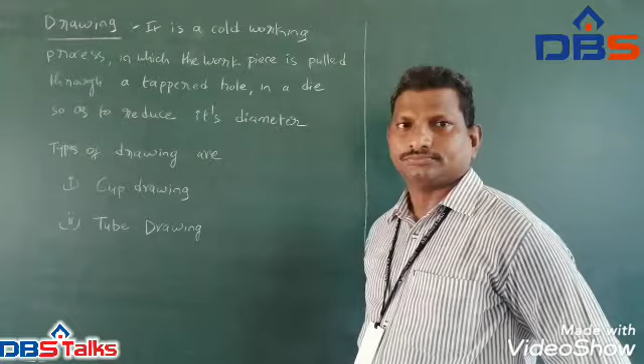Let us discuss the process of drawing. Drawing is also one of the sheet metal working processes which we may do on sheet metals.

So what is meant by drawing? It is a cold working process in which the workpiece is pulled through a die. This die will have one hole, and through this hole the workpiece is pulled so as to reduce its diameter.

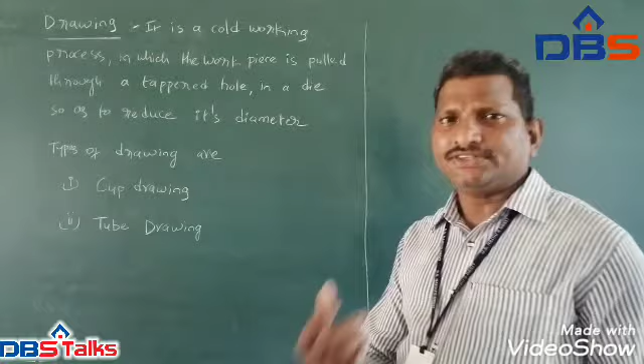Drawing is a cold working process. How can we say so? The temperature at which we do the sheet metal work is lesser than the recrystallization temperature, then that process is called a cold working process. Here we are carrying out this drawing process at a temperature lesser than the recrystallization temperature, that is why we are calling it a cold working process.

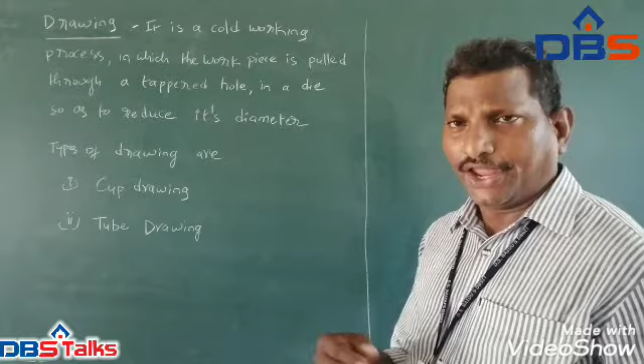So in this drawing process, what is the main aim? We have to produce devices like cups and tubes. If the drawing process is used to produce cups, then the process is called cup drawing. And if the drawing process is used to produce tubes, then this drawing process is called tube drawing.

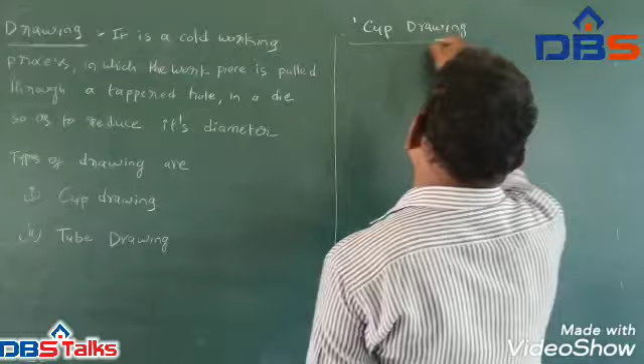Let us discuss the mechanism presented in the cup drawing. In this cup drawing method, the devices we need are punch, die setup, and sheet metal.

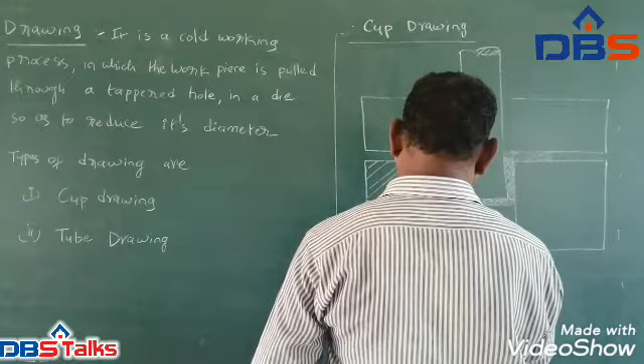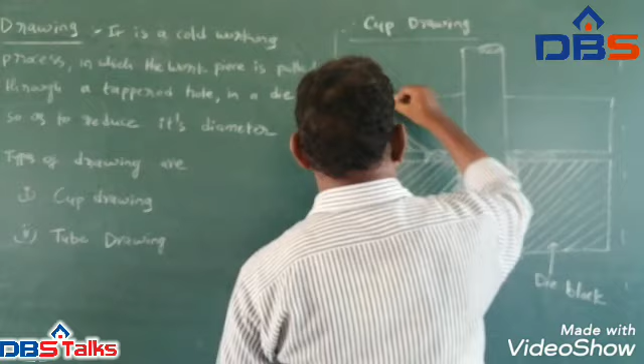We are drawing the hatching section of the die block. This is called the die block. And now we are drawing the hatching section of the punch holder. This is the sheet metal. Punch, okay.

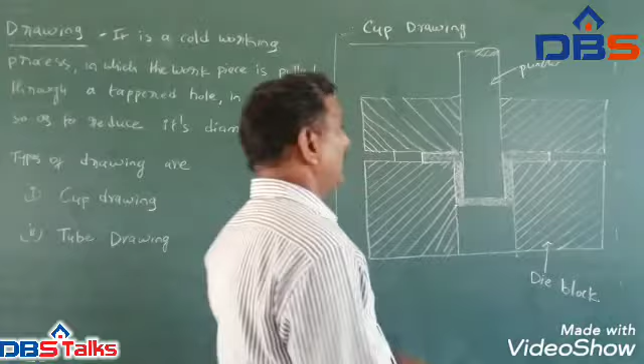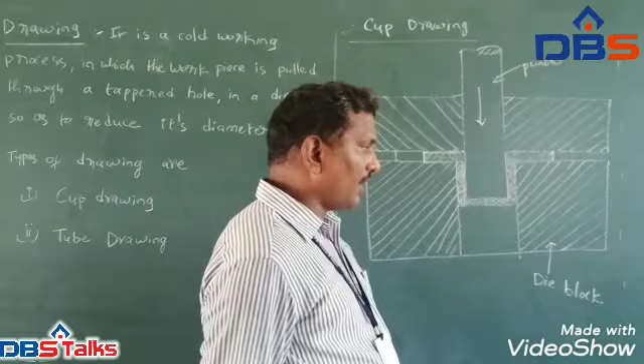You are seeing a schematic diagram for the cup drawing process. What are the devices which may be used in a cup drawing process? Die block, punch, and stock or sheet metal.

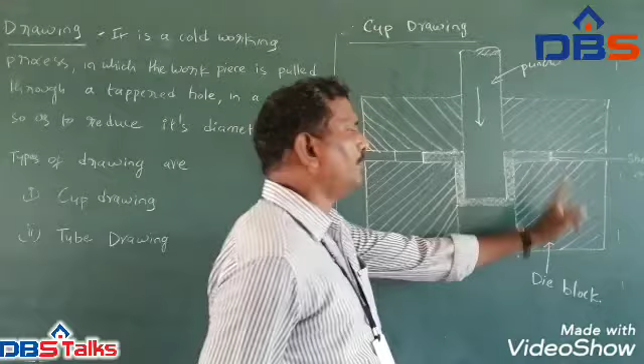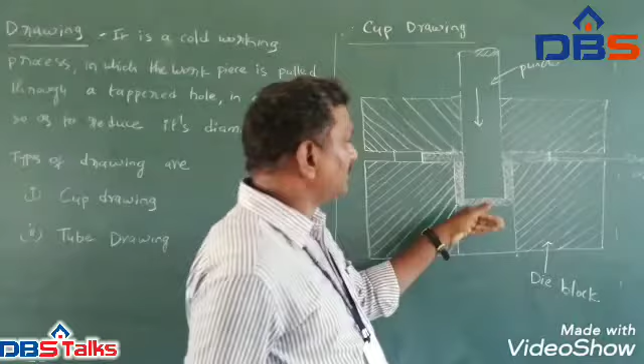What is the shape of this die hole? This is just like a cup. So before producing this cup element, first we will place the flat sheet metal on this die block and put the punch holder upon it. Then we will allow the punch to fall down into the die block hole of required size. Because of the force acting upon the sheet metal, this flat sheet will turn into the cup-shaped object.

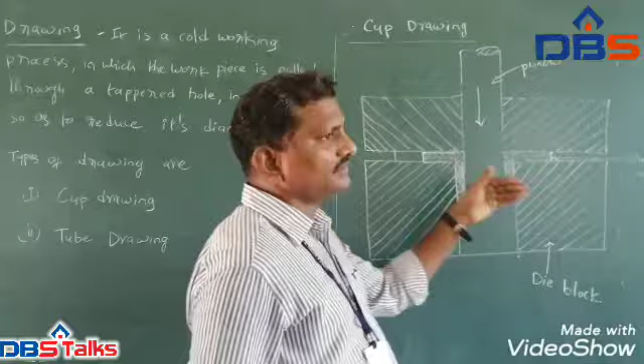After producing this cup, the punch will be moved up and we will collect the produced cup. By this, we will produce the cups. Since the cup is produced by the method of drawing, that is why we are calling it the cup drawing method.

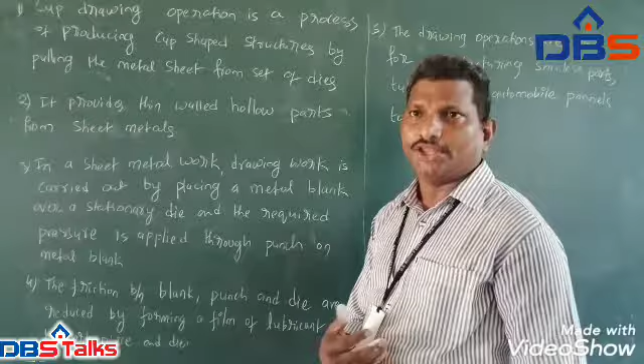Let us discuss the main points presented in the cup drawing process. The cup drawing operation is a process of producing a cup by using a die, punch, and a blank.

What is meant by blank? Blank is the input sheet or input material which is meant for producing the cups. This is taken from the sheet metal.

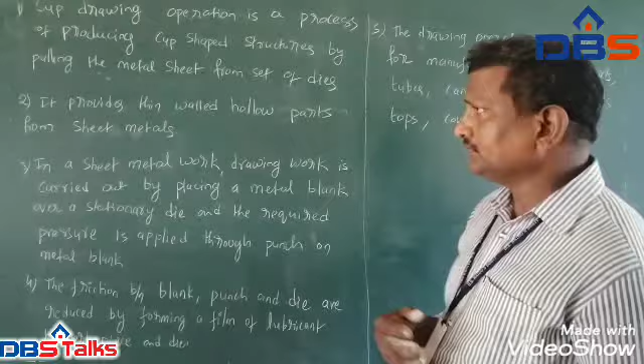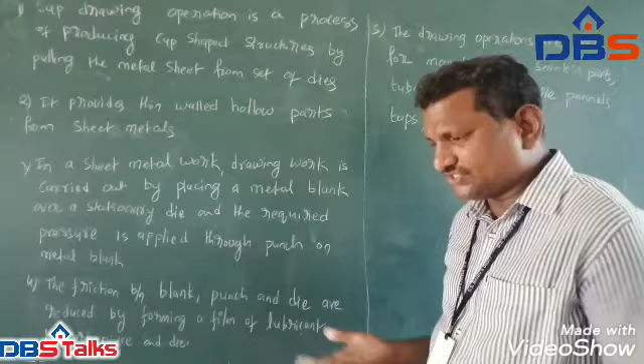So what is the procedural steps involved in producing the cups? First, the input material or blank is placed between the stationary die and punch. As the stationary die rests on the ground and the punch rests on the blank, in between these two there is a hole or cup-shaped cavity presented in the stationary die.

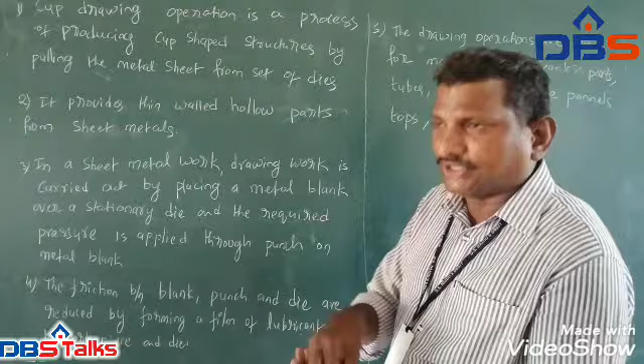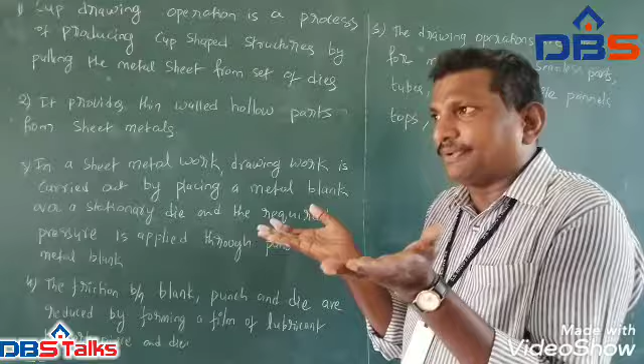Once the punch is allowed to fall on the blank, which passes through that hole, what will happen? A pressure or force will exert on the blank. Because of this force, a cup-shaped object will be produced.

So in this mechanism, there exists friction. To reduce the friction, we will apply a lubricant, a thin lubricant film, in between these three contact surfaces.

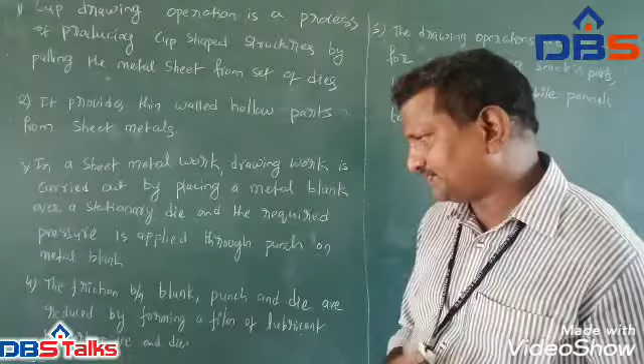By using this cup drawing operation, we can produce thin walled cups. The drawing operations are also used to manufacture or produce seamless parts, seamless tubes, automobile panels, and automobile tops.

Let us discuss the tube drawing process. Tube drawing. By seeing this title, we can understand this method is used to produce tubes by the drawing sheet metal work process. What are the devices we need? One is a vertical die with a hole.

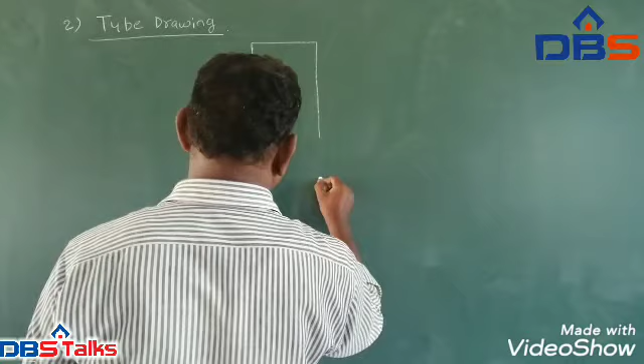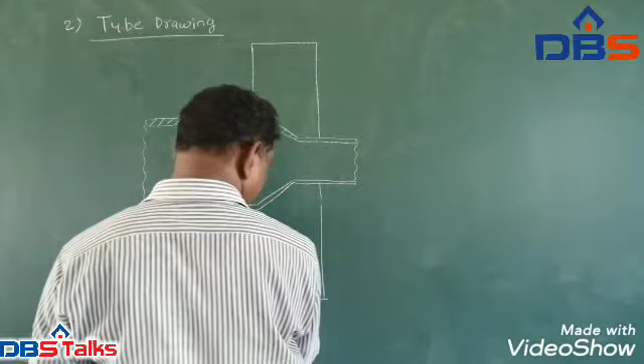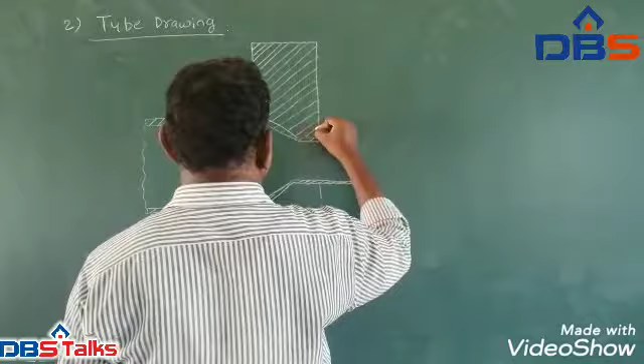We are drawing the hatching section of the vertical die, which has a small opening of reduced diameter.

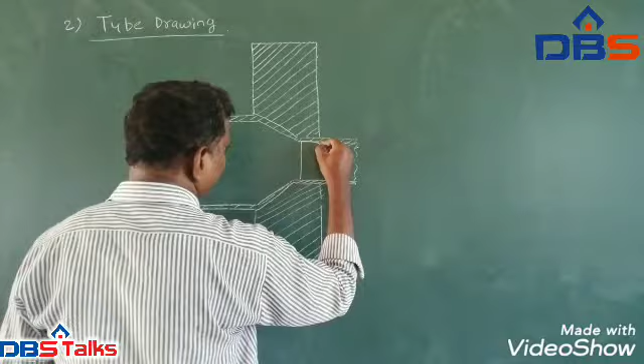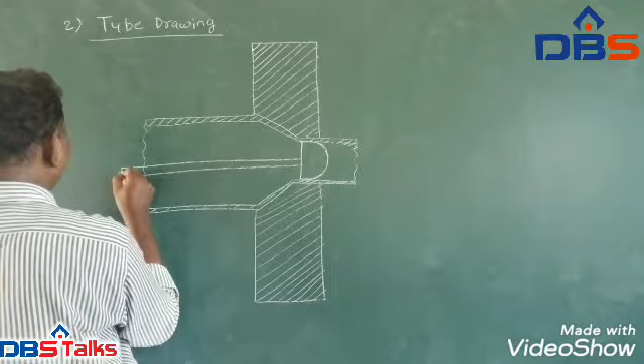Now I am drawing the die. This die has a diameter which is approximately equal to the required diameter of the produced tubes. Here, one tapered section is provided for smooth flow of the blank.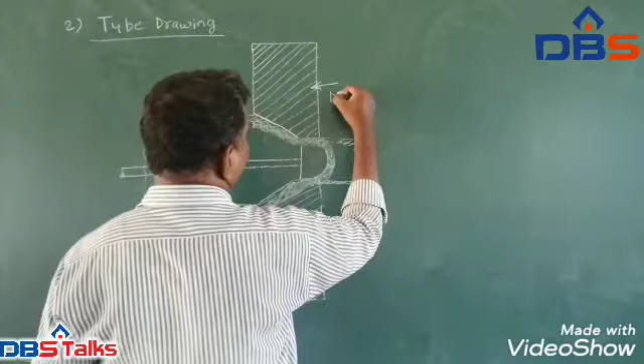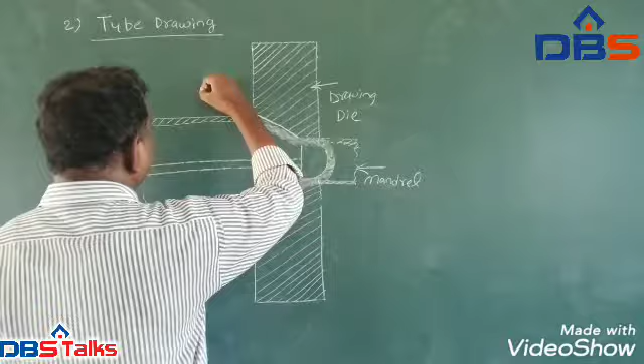This is the drawing die, and this is the mandrel, and this is the hot rolled tube.

You have seen a simple schematic diagram which represents the combination of drawing by mandrel and hot rolled tube, which is used to produce the tubes.

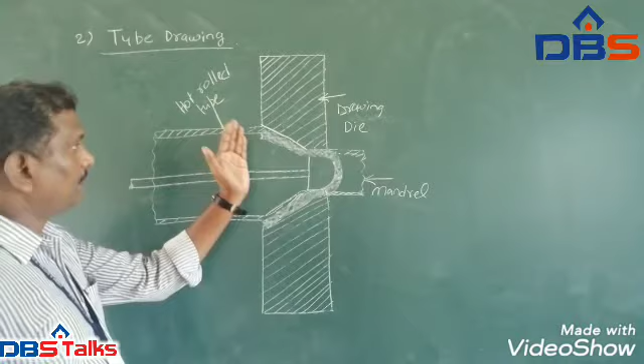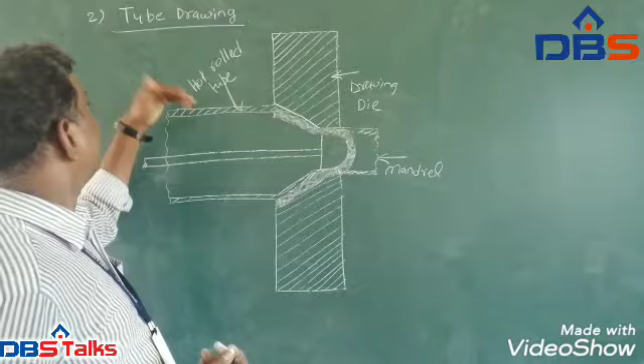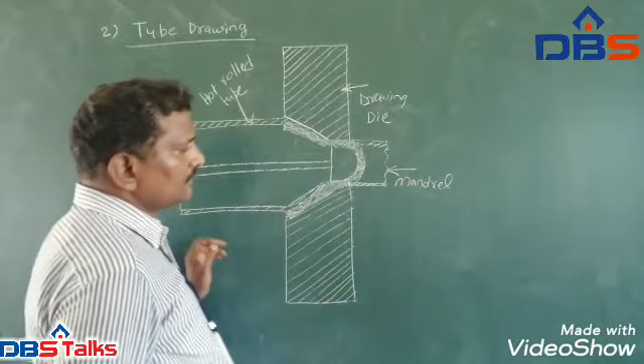So here is a mandrel and here is the tube drawing die. Through this hole, as this mandrel is pressing, the blank is made to pass through the hole or cavity of the die. So the produced object will be a seamless tube. By using this method, we can produce seamless tubes.

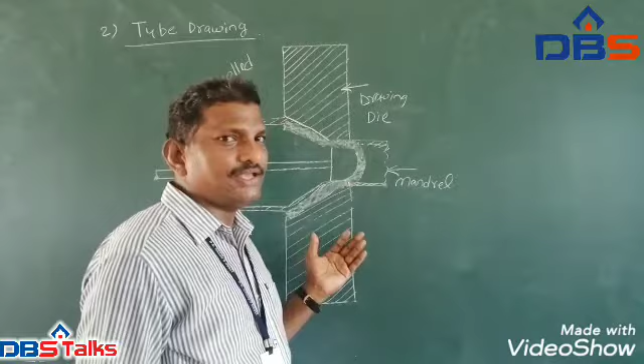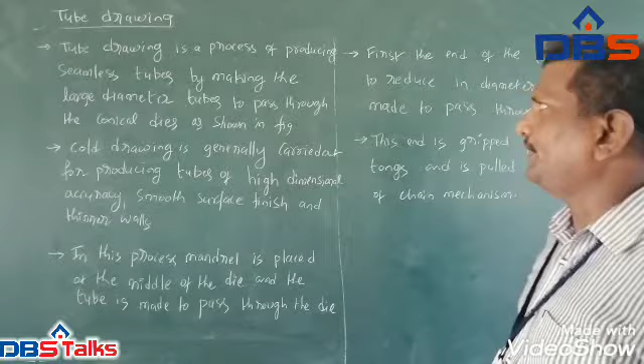Let us see the main points presented in the operation of tube drawing. Tube drawing is a process of producing seamless tubes by making the large diameter tubes pass through conical dies, as shown in the figure.

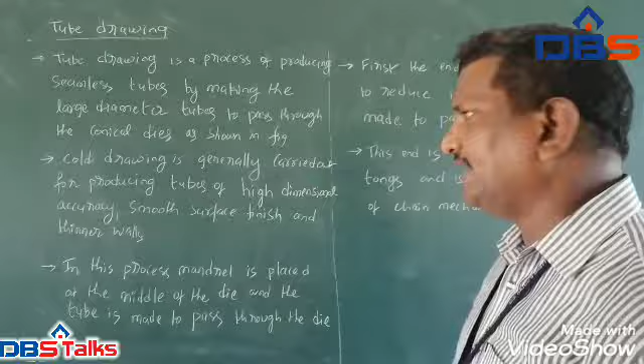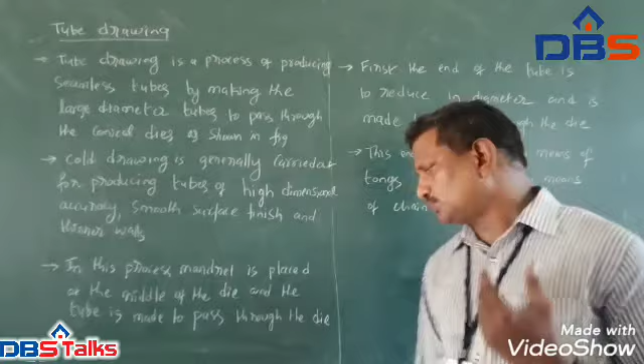Cold drawing is generally carried out to produce tubes of high dimensional accuracy, smooth surface finish and thinner walls. In this process, a mandrel is placed at the middle of the die, and the tube is made to pass through the die whose diameter is to be reduced.

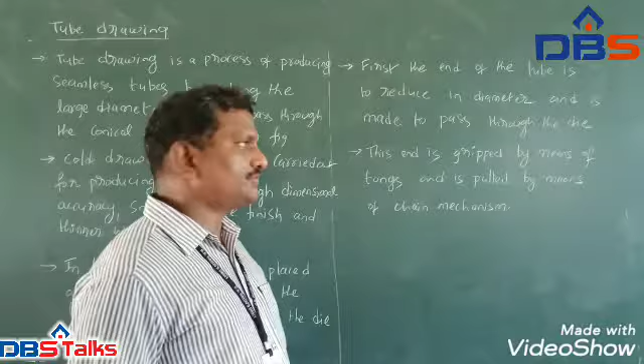The tube is heated and its temperature is raised to the recrystallization temperature, and it is made to pass through the die. First, the end of the tube, at which the diameter is to be reduced, is made to pass through the die. This end is gripped with tongs, and then it is pulled using the chain mechanism.

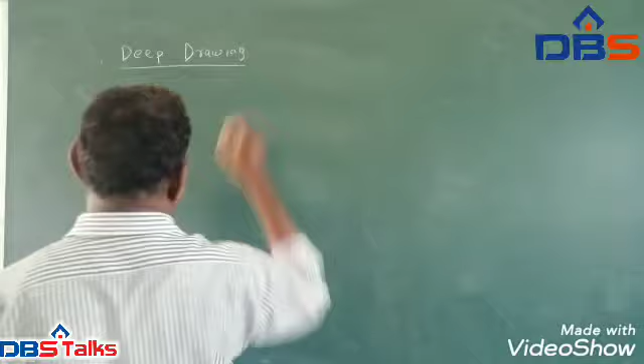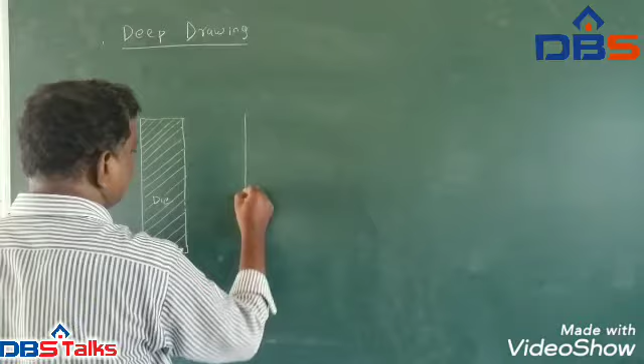One more method presented in drawing operation is deep drawing. Now let us draw the stages of die blocks, and one more die block.

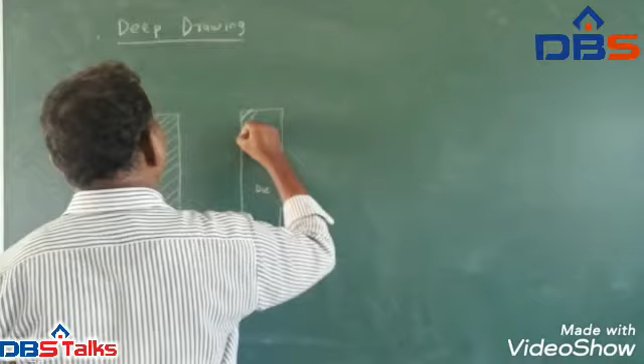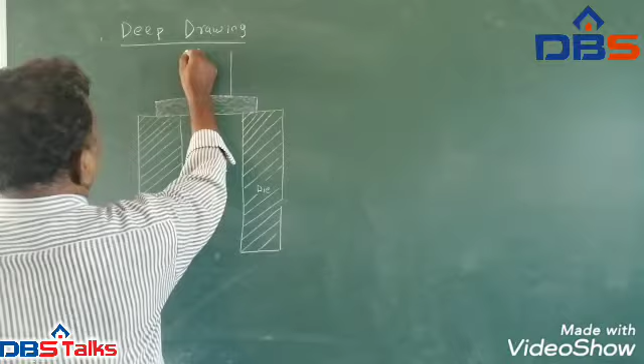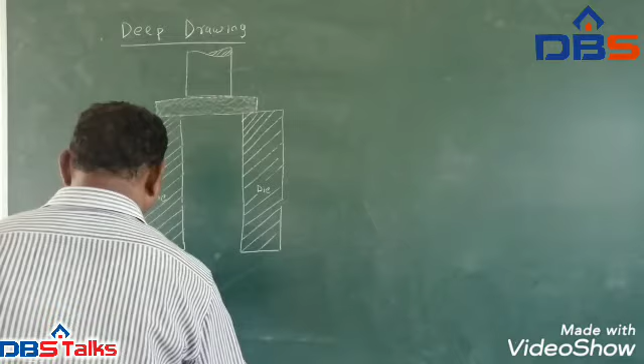Now we are drawing the schematic diagram which represents the deep drawing process, which is used to produce cups of larger depths.

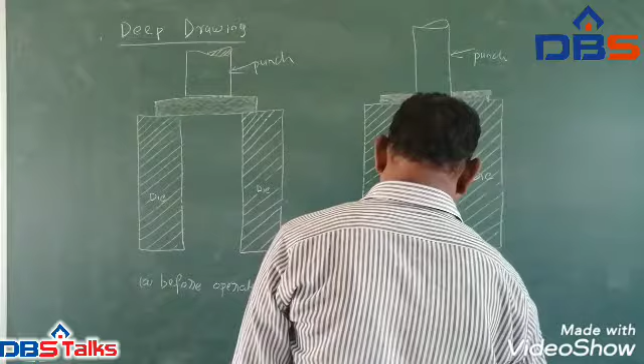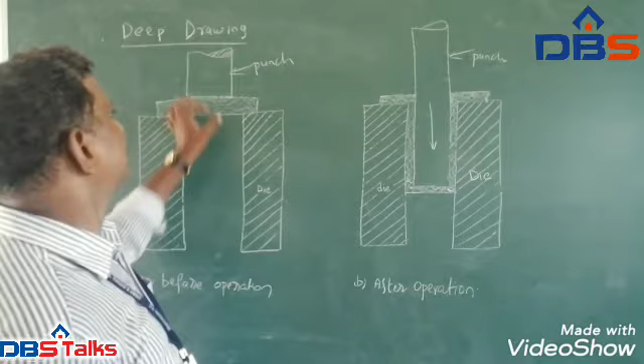Case B indicates the setup after the operation. In figure 1, simply a metal sheet or blank is placed on the two stationary dies, and we attach one punch.

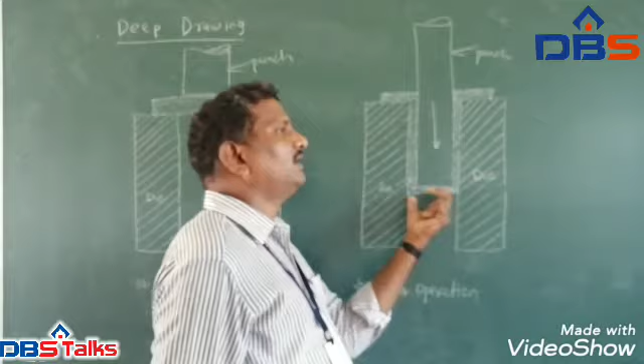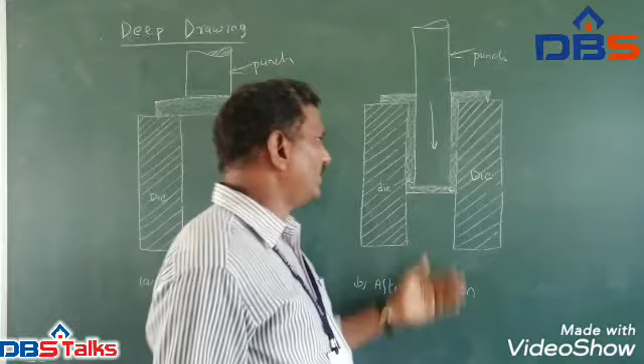To produce cups using this deep drawing method, the punch is made to press or exert a certain force on the blank. Between these two dies there is a cavity equal to the outer diameter of the cup. As the punch continuously presses and exerts force in the downward direction, a thin-walled cup of the required depth will be produced.

By using this deep drawing method, we can produce milk cans, washing machine tubes, and other engineering components.

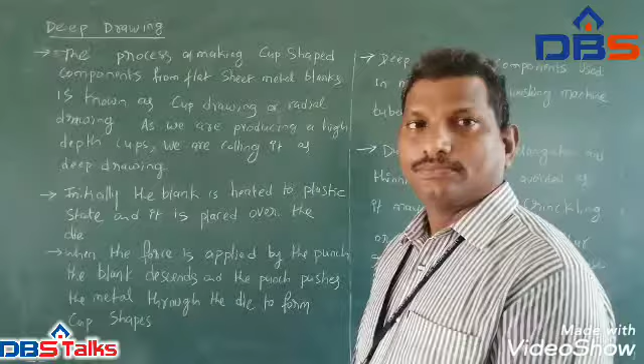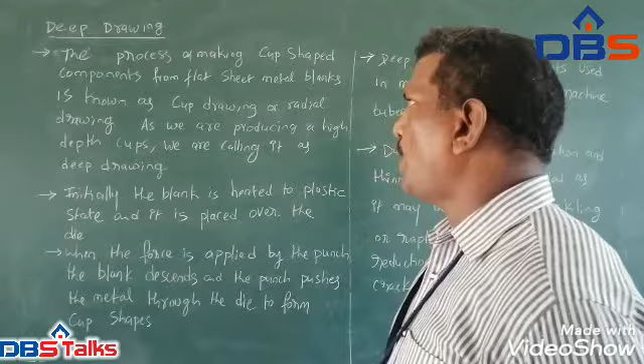Let us discuss the important steps presented in deep drawing. The process of making cup-shaped components from flat sheet metal blanks is known as cup drawing or radial drawing. This method is also called deep drawing, because we are making cups with higher depths.

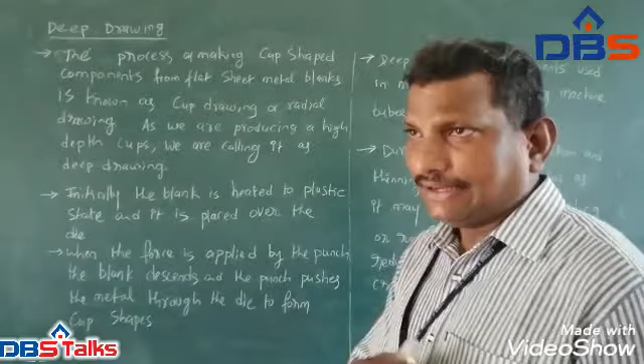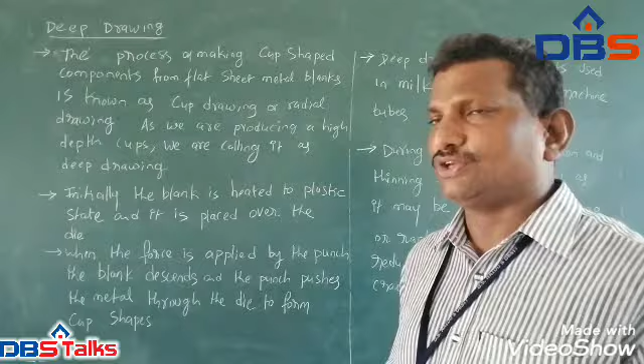Initially, the blank is heated to a plastic state and is placed over the dies. Why do we need to heat the blank to a plastic state? Whatever operation we carry out must result in permanent deformation, with no spring back effect. That is why we heat this metal to the plastic deformation state.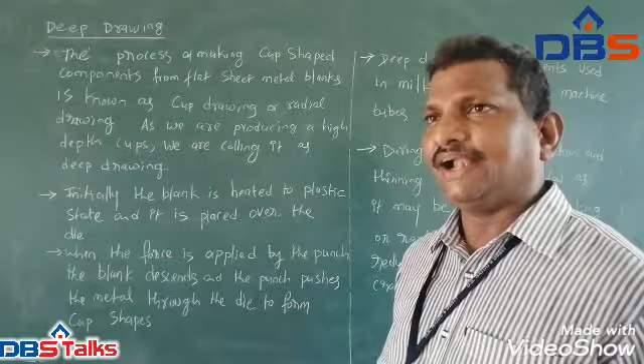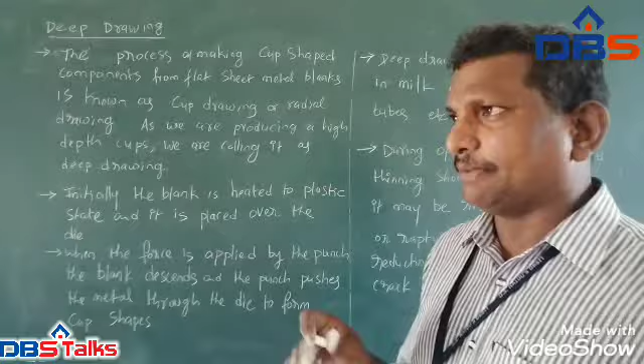Also, once we apply heat to the bodies, recrystallization takes place: disintegration of the old grain structure and simultaneous formation of new grain structure with reduced size. So before applying pressure or force on the metal sheets or blanks, we have to heat the bodies to a certain temperature.

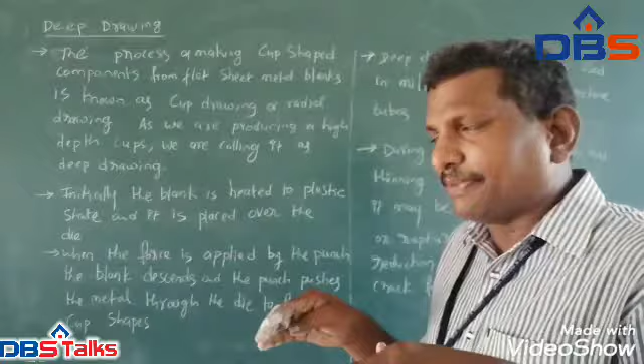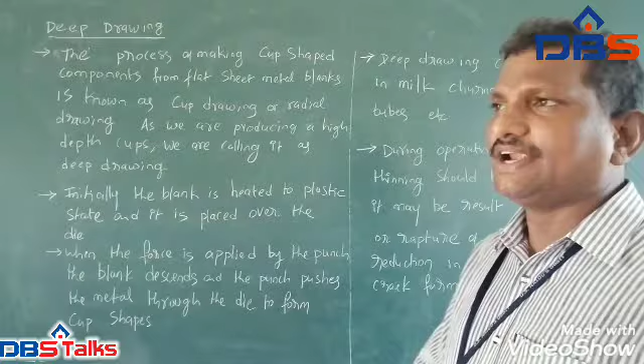After heating, the object or blank is placed on the dies, and then force is applied through the punch. Once the force is applied on the blank or sheet metal, the metal is forcefully made to flow through the cavity or hole presented in the die. As the punch descends, the cup will be formed.

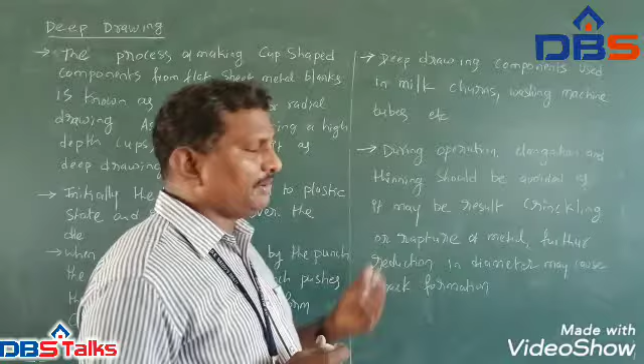Deep drawing components are used in milk churns and washing machine tubes. During operation, elongation and thinning should be avoided, because if the metal or blank continuously elongates and thins, it may result in wrinkling and rupture, and further reduction in diameter may cause crack formation.

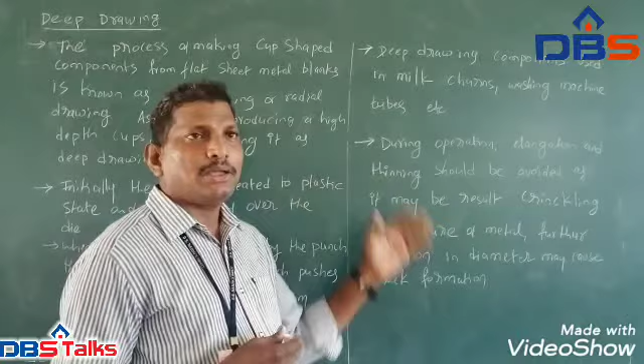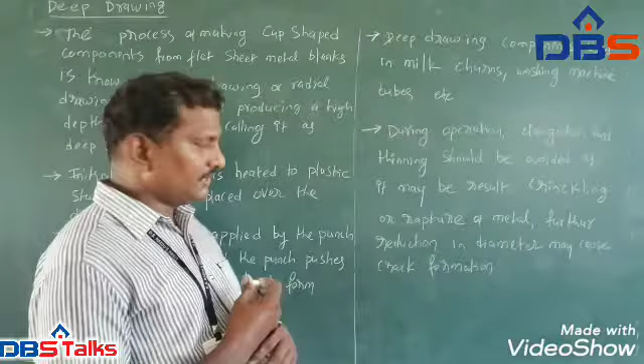If any cracks take place on the metal, it will cause defects on the produced components. So we have to avoid such crack formation. During operation, elongation and thinning should be kept within the permissible limit to avoid material waste, operation waste and pressure waste.

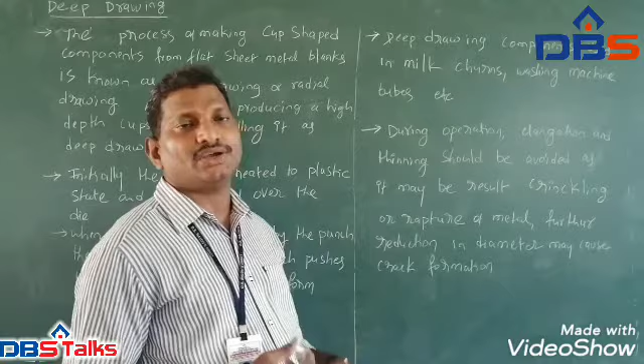The produced component has to be ready for use. If any crack is present, it will be found out during quality control. There is also another method available with drawing concepts, known as redrawing.

This redrawing method is used to reduce the diameter of an already drawn cup. Using appropriate required setups, we can reduce the diameter of the drawn material.

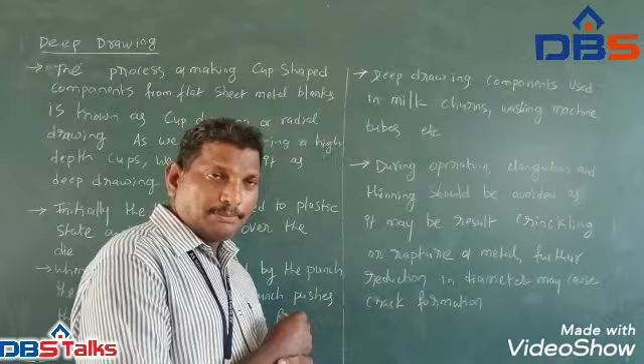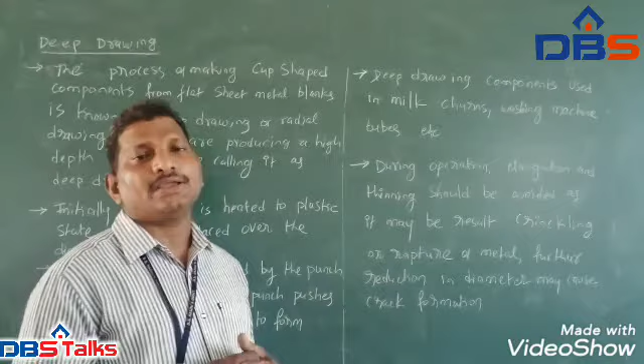Whatever the cups may be, they must have the required shape, diameter, tolerances, precision and accuracy. Once the produced good has the appropriate and required diameter, accuracy, surface finish and precision, we can use that cup for any other purpose. If the diameter is slightly higher than required, we may go for the redrawing method to reduce the diameter.